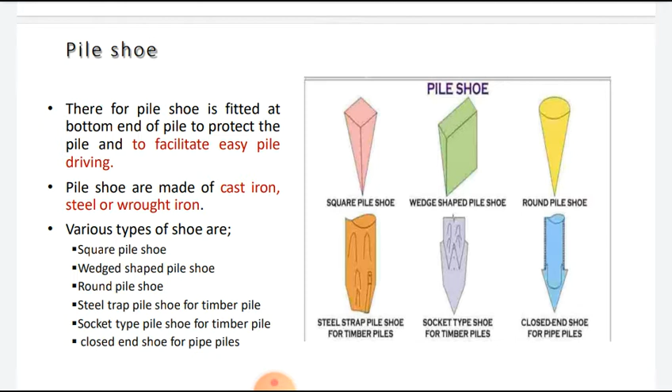Pile driving equipment: the process of inserting pile into the ground is called pile driving.

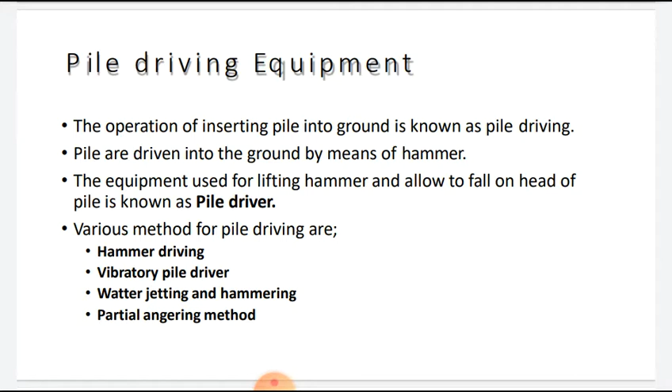So we have various methods: hammer driving, vibratory pile driver, water jetting and hammering, and partial augering methods.

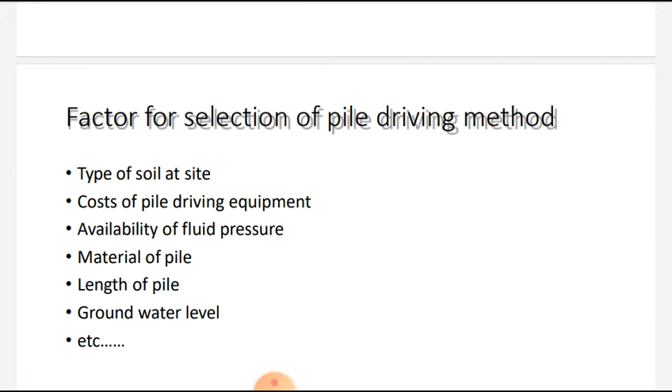Before going for a pile driving method, we have to consider some factors: the type of soil available at the site, cost of pile driving equipment, availability of fluid pressure, material of pile, length of pile, and groundwater level, etc.

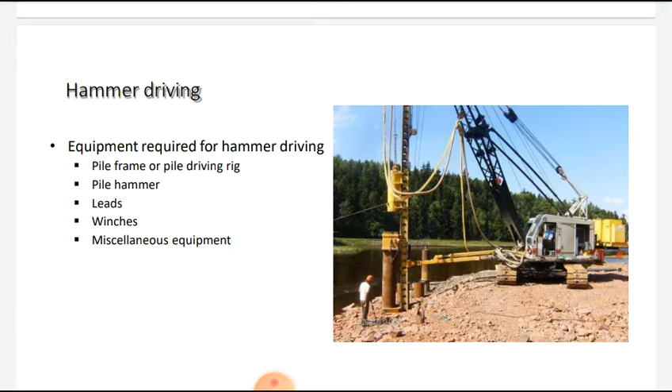Next is the pile hammer. Next is the leads. Next is the winches and other miscellaneous equipment.

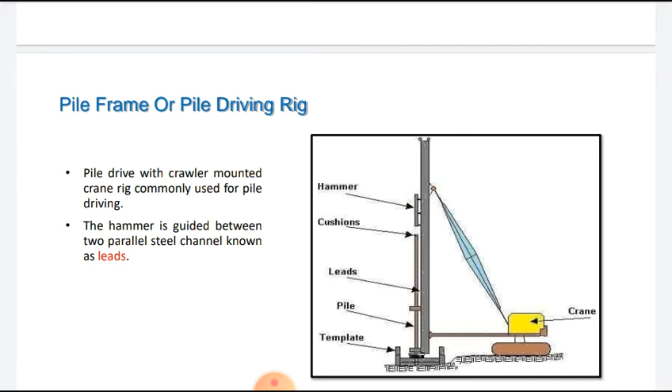First we'll see what is pile frame or pile driving rig. This pile driver with crawler mounted crane rig is commonly used for pile driving.

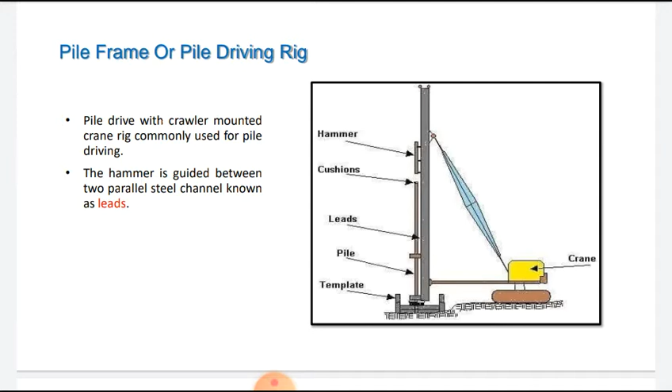The hammer is guided between two parallel steel channels which is called a lead. In this picture you can see the crane, mounted on a crawler wheel, and we have leads which are placed between two parallel steel channels.

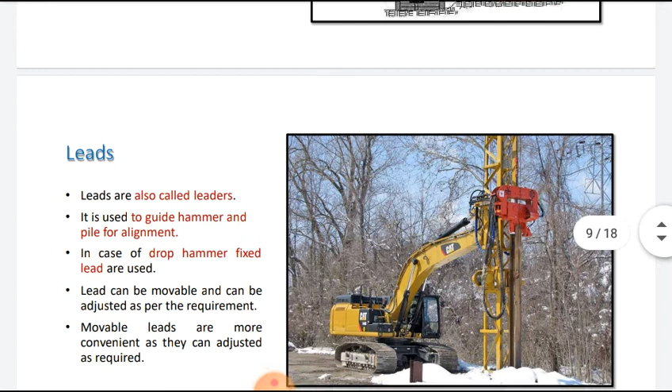Leads are also called leaders. They guide the hammer and pile for alignment, so that the hammer comes straight down to strike the pile correctly. In case of drop hammer, fixed leads are used. Leads can be movable and adjusted as per requirements, and movable leads are more convenient since they can be adjusted as needed.

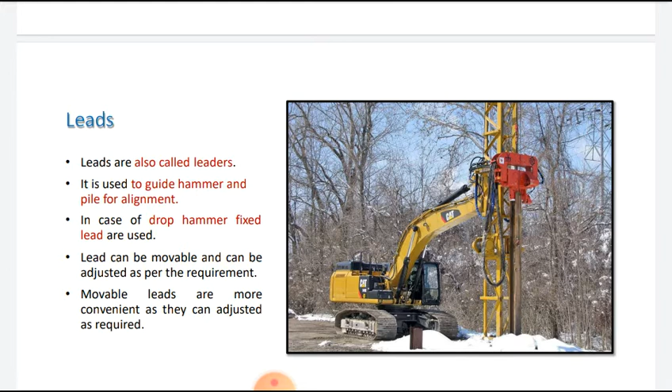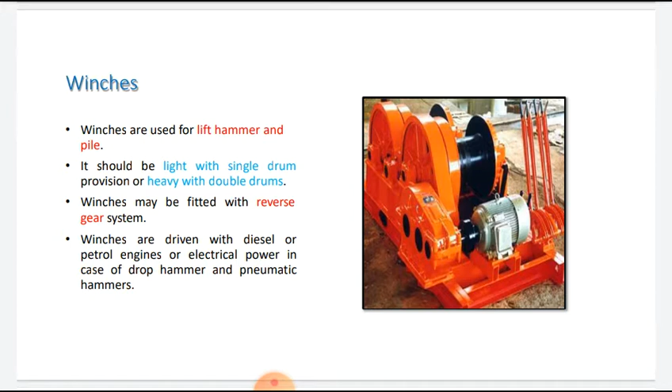Next is winches. The hammer needs to be lifted up and lowered down, so we need lifters called winches, used to lift the hammer and pile. They should be light with a single drum provision or heavy with a double drum. Winches may be fitted with a reverse gear system, and are driven with either diesel, petrol engine, or electrical power in case of drop hammer and pneumatic hammers. So pile hammers also have some types: drop hammer, single acting hammer, double acting hammer, diesel hammer and vibratory hammer.

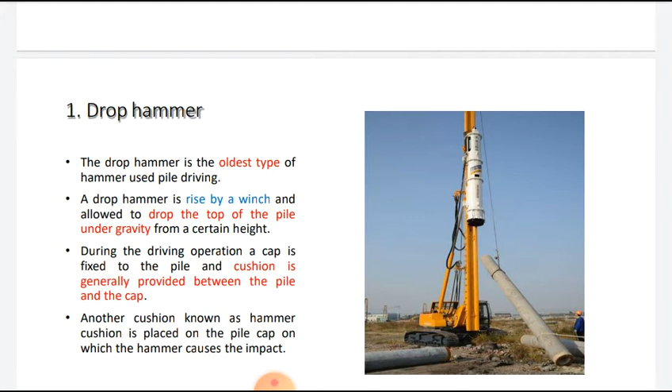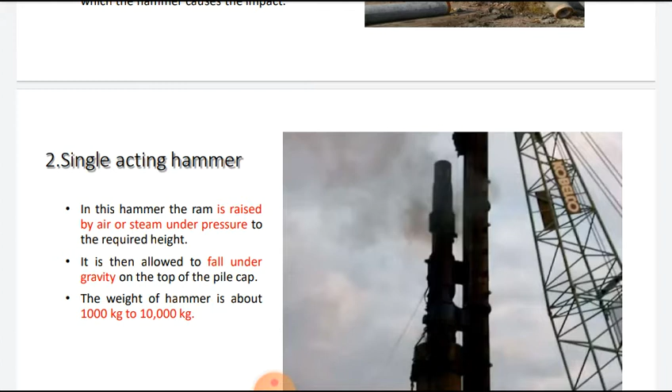Next is single acting hammer. In this hammer, the ram is raised by air or steam under pressure to the required height, then it is allowed to fall under gravity on top of the pile cap. The weight of the hammer is about 1000 to 10,000 kg.

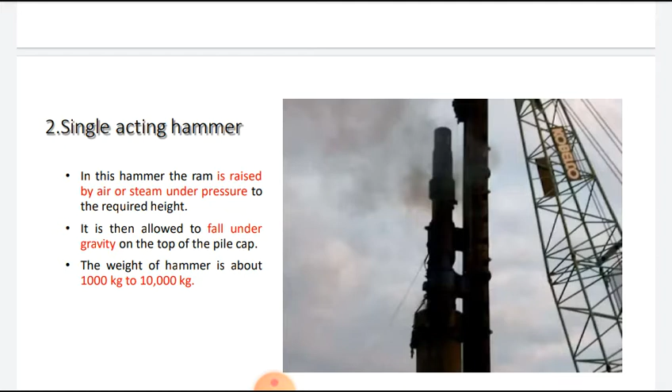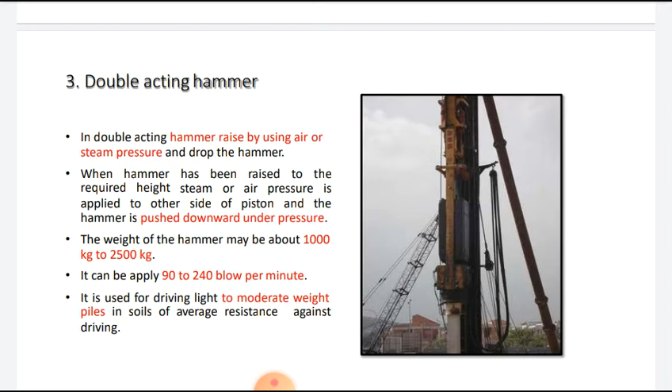In double acting hammer, the hammer is raised by using air or steam pressure and dropped. When the hammer has been raised to the required height, steam or air pressure is applied to the other side of the piston and the hammer is pushed down under pressure. The weight of the hammer is 1000 to 2500 kg, and it can apply 90 to 240 blows per minute. It is used to drive light to moderate weight piles in soil of average resistance against driving.

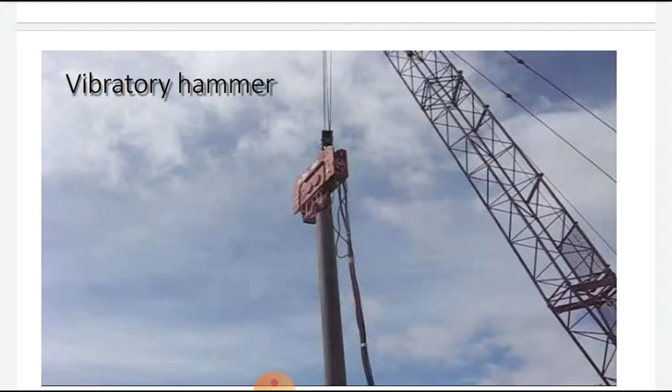In a vibratory hammer, there is no hammering action; instead, they use vibration force to drive the piles.

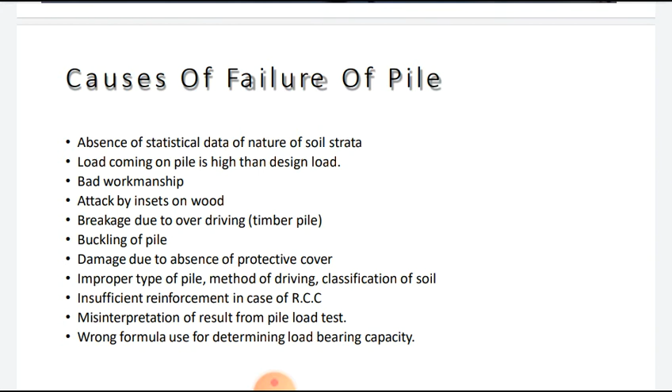What are the causes of failure of a pile? When a pile fails there can be many reasons. Some of them are: absence of statistical data on the nature of soil strata, load coming on the pile being higher than the design load, bad workmanship, attack by insects on wood, breakage due to over driving, buckling of pile, damage due to absence of protective cover, improper type of pile or method of driving, misclassification of soil, insufficient reinforcement in case of RCC, misinterpretation of results from pile load test, and wrong formula used for determining load bearing capacity. These are some common causes of failure of piles.

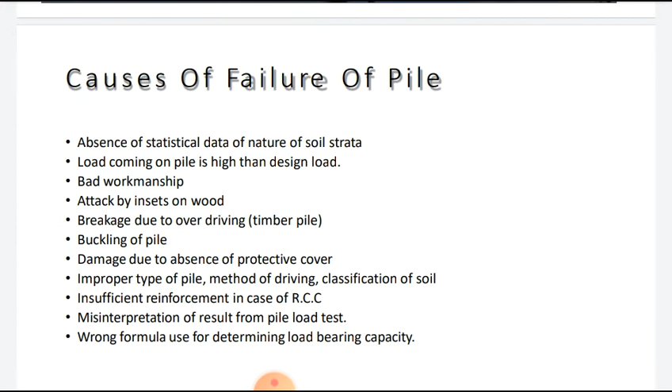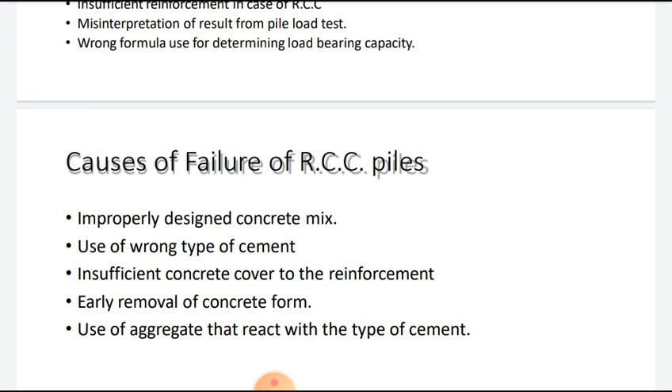This is mainly for RCC piles. The failure is due to improper design of concrete mix, use of wrong type of cement, insufficient concrete cover to the reinforcement, early removal of concrete formwork, and use of aggregate that reacts with the cement. Thank you.